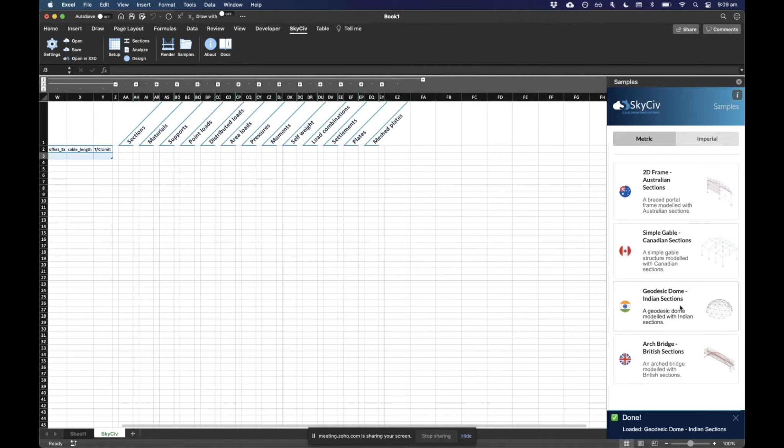There's all sorts of silly ones here as well as a few real ones. You could just open up one of these, and it'll bring the data in for you to experiment with, and you can work forward from there if you like.

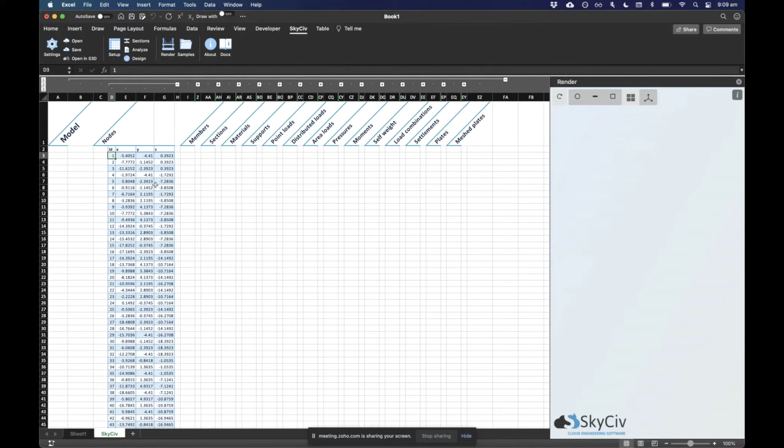Other than samples, we've got the renderer. This is really powerful to have inside Excel, because as you're building this model out, you can actually see what you're building as you build it. It'll live update — so that's the model we just clicked in the samples, reading straight off the sheet. If I deleted a few members there, you'll see it update.

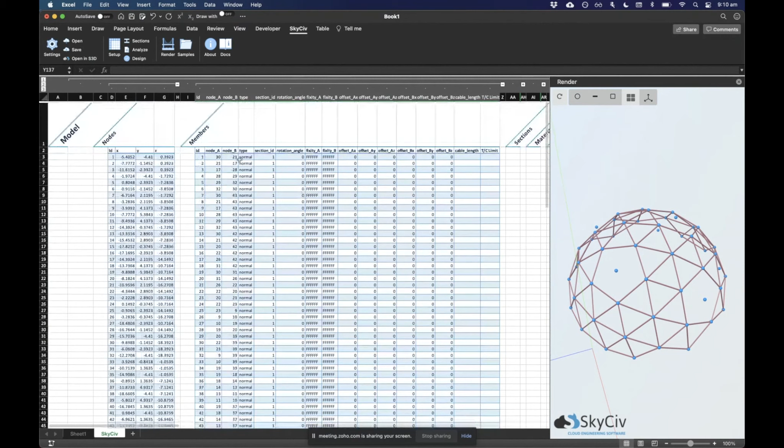There you go — you can see a few of the members have dropped out. It looks like we've just lost the lights in here.

Other than that, you can just build up your own model and you'll see it going. In fact, I might just show you what that looks like if we went from a clean sheet.

So we've got a node — we might just need to refresh that. Put in node 1, node 2. We'll put that at the origin, and then put this one at x of 1, 0, 0 — and you can see the two nodes have appeared here now. Then you can put a member in from node 1 to node 2, and you'll just need to give it a section ID as well. Even though we haven't defined any sections, the renderer needs that to understand there's something going on.

By default, the renderer will just show a square section. At the moment, we're actually trying to develop a way that we can provide detailed data of the section, so you can actually see the shape from within here, like you can on S3D. There's a few other things in here.

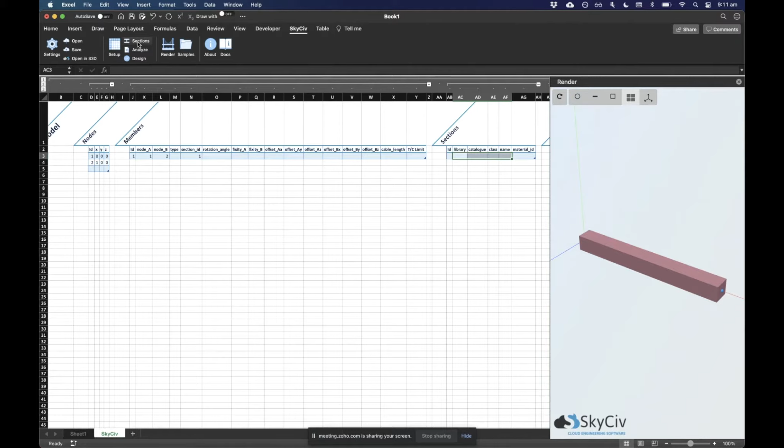You've got a section library, so when you need to put in sections, you've got to get these names pretty correct. You can do that by going through here, selecting whichever section and then inserting it, which we'll do later on.

You've got your analysis and design tabs in here, and then open and save. Open and save will let you grab models from the platform itself and import them into Excel. You can edit them, and then save them back to the platform. It's pretty handy if you've got a model already and want to run some calcs on it that you could do typically in Excel, especially if you're really good with Excel, you might find it easier to manipulate things in that sense.

The other main tab would be settings, where you can authenticate with your API details and also set up the model settings. You can change the vertical axis from Y to Z, and set the units for each of the different parts of the model. If you're into coding and using the API, you can also grab the model as a JSON object, which will copy it to your clipboard straight off the sheet you've built out. If you don't know what that means, don't fret, you don't really need to for now.

So with that, we'll look at one that I've already built, just a very simple example that shows you how handy it can be to use Excel to create other things. What I've done here is used formulas to create a curved facade.

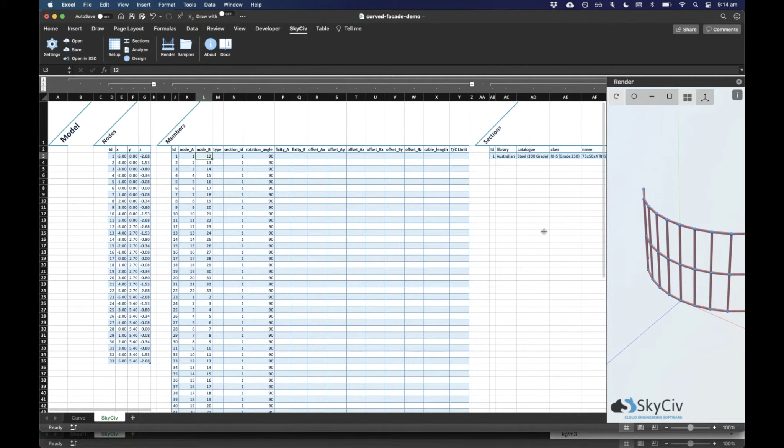You can see the reference here goes straight to that other one, and then we've got members, which have taken these IDs here and pasted them in. I'll open up the renderer, and you can see that facade there, the grillage. I've taken these IDs and aligned them to work my way along the bottom here, and then from there to there, and so on, and then vertical ones as well.

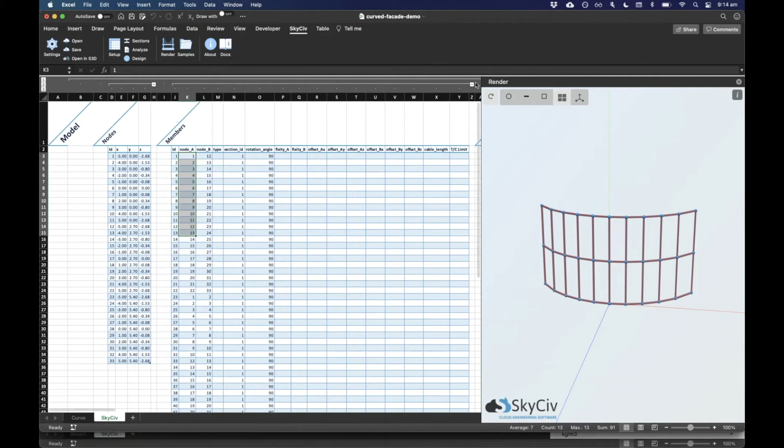There's a few other parameters that you can put in here to rotate members, offset them. We'll just collapse that one and flick through these other ones. So for the sections, I've gone with an Australian RHS.

Which is the rectangular hollow section. You can go into the library here and you'll see that it provides you with all those different details. You need to get these values exactly as they should be according to the library, so that's why we've added this in here.

So you could just go into, say I wanted to change it to square hollow section, we could go down to here and put in 65 by 3, and you'll see that here now. Then you can choose whatever section. As you add more sections, you'll see that they become available in here, and you can insert them. So if we did that, you'll see that inserts the SHS here.

Another important note here is that the handles on tables, that bottom right handle, defines what's in the table, and we use these to work out what data to pull out. So just make sure that you've always got the handles in the right place.

At this point, there would be 2 sections in the model. If I move that to here, there's now only 1 section, so I can just get rid of that anyway. Just be wary of that to make sure they're always in the right position to collect all the data.

Materials, you can define them yourself. There's a class key here which helps the design module. If you're going to do design, putting in steel will say this member is a steel member, so we need to run a steel design on it or something like that.

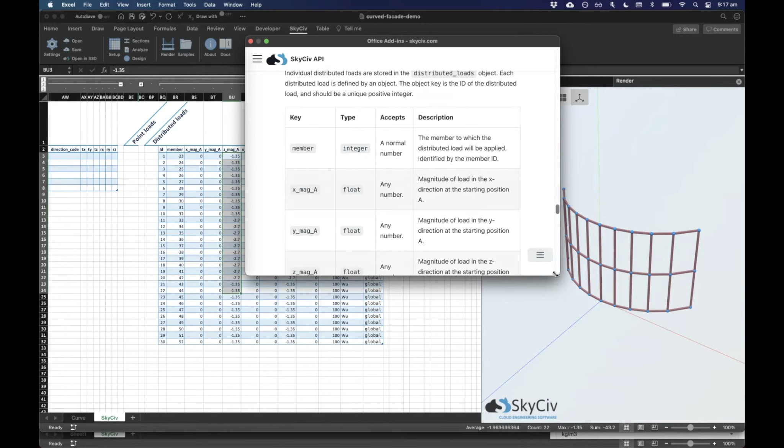In here, you can see all the parameters that line up with the columns. This is actually for the API, but that's what we're using with this Excel plugin, so the same information in here goes for the sheet. You can see that axis can be either global or local, and case does matter here, so that's why I've put in global.

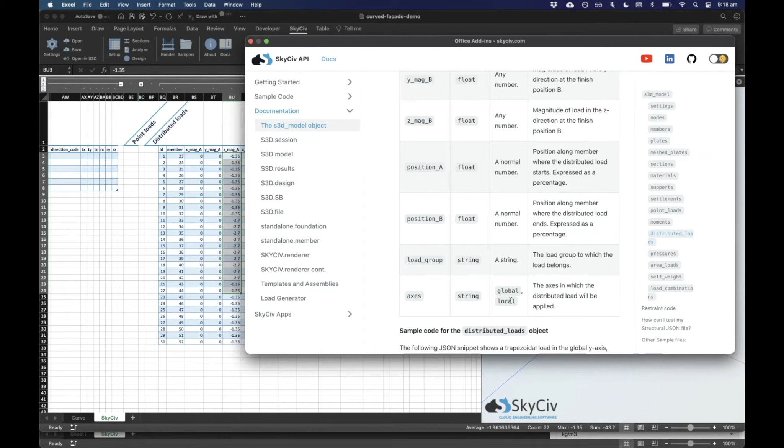Other than that, these ones are all pretty straightforward. We've created a load combination with WU, which is the load group we've assigned here, and the self weight, which is from here. So once you've done that, you'd want to authenticate.

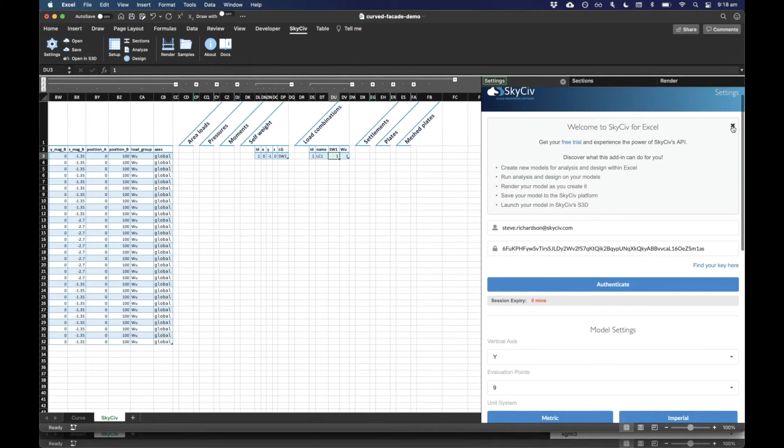If you go to here, you can find your key if you're not sure what your API details are, and that'll take you straight to the window in here. So you can just grab them out, copy them in, and then you can set the model settings, any details.

And once you've run—didn't put any details in there, so we're on the wrong sheet, that's why. Here you go. So if we run authenticate on that, that'll take a moment.

That's just constructing an API call to start a session, and each session usually lasts for about 30 minutes. We've put something here which will tell you that the session's expiring, but we've also recently set up the API so that as long as your details are here, it'll re-authenticate for you.

If you send a call after that time expires, it might just take a bit longer, but it'll re-authenticate and give you back a new session ID, which will be stored in there to speed up subsequent calls in that session.

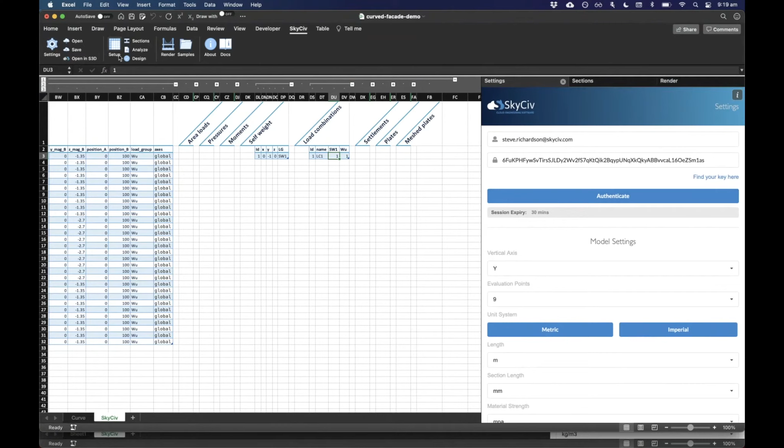So once we've authenticated, you've now got access to a few other things like opening models, analyzing, design. If you go to here, this will show you any of your file manager from platform, and then you could load up any model from here.

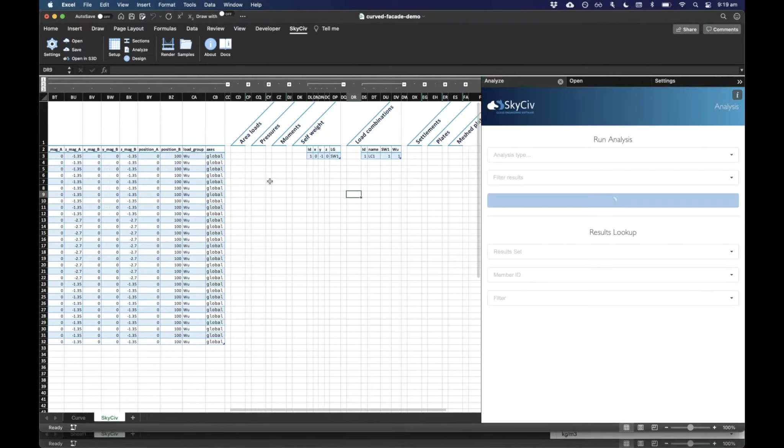So we might just run some analysis. Or to start with, a good way to confirm that your model's working, if you're not too sure, you can run this open in S3D button here.

This doesn't actually open a task pane, so you'll just see a little note down here saying that it's working. It just takes a moment. So you'll see it opens up a window and it loads it up in S3D.

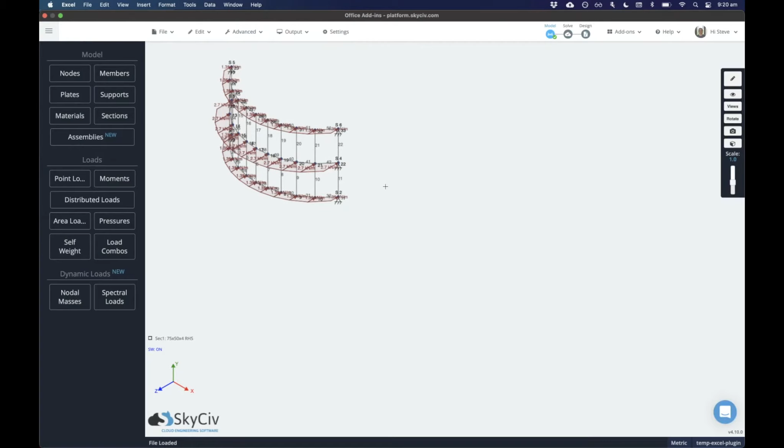You can see that's looking pretty good. The loads look about right, the supports are right. We could run a solve on it, and if everything's good, it'll run just fine.

Then you can sort of, as you would normally, go into here and look at anything else, any of the other information. So we'll get rid of that.

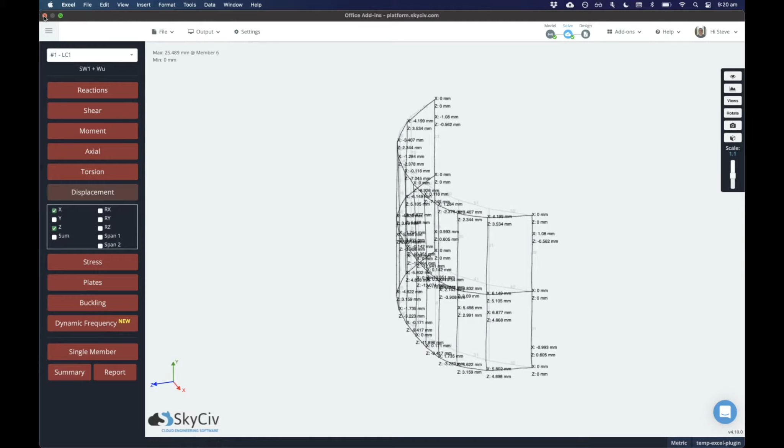Same thing as we just did there, you could run it in here. We've added some filter fields here. The data that comes back can be really heavy if the model gets big and you've got a lot of load cases, load groups, load combinations.

So what you want to do is, if you don't need all that data, set a few of these filters on it, and it could save you quite a lot of data and time as well, because it takes time for all that data to come back if you're on a slow internet like us here in Australia. So you can hit solve there.

Again, this is in the background. This is constructing an API call, if anyone's familiar with that - refetching the session, grabbing the model, putting it into a model solve function, and then sending it off. Data comes back, and you'll see it opens up or creates a bunch of new sheets down here. So we've got that load combination, the wind ultimate load group that we put on, and the self weight.

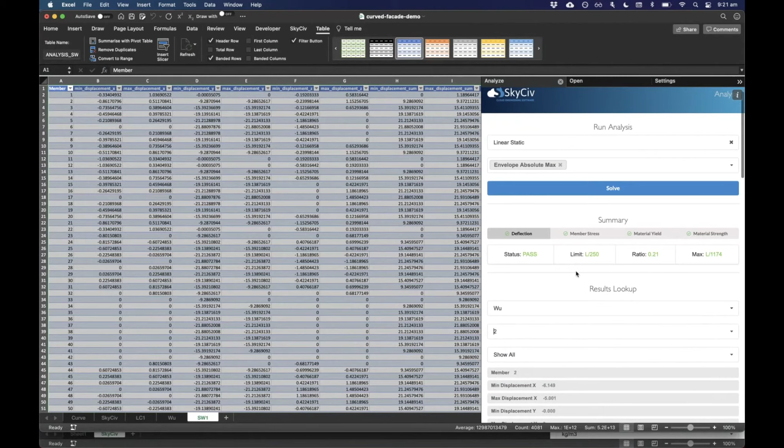So that's all the data's in there, it's quite a lot. We've also put in a little results lookup here, where you can pick one of the sheets and go through whatever member, and then filter by particular elements. So if we just click axial here, you'll see it'll only show the axial data.

And then similarly, we can go over and do a design. You can pick from your codes here. So if I go down here, I'm using an Australian steel design. I can run a design there.

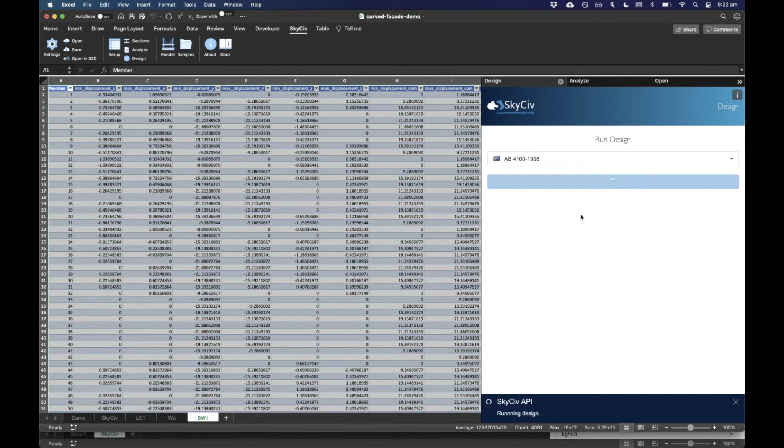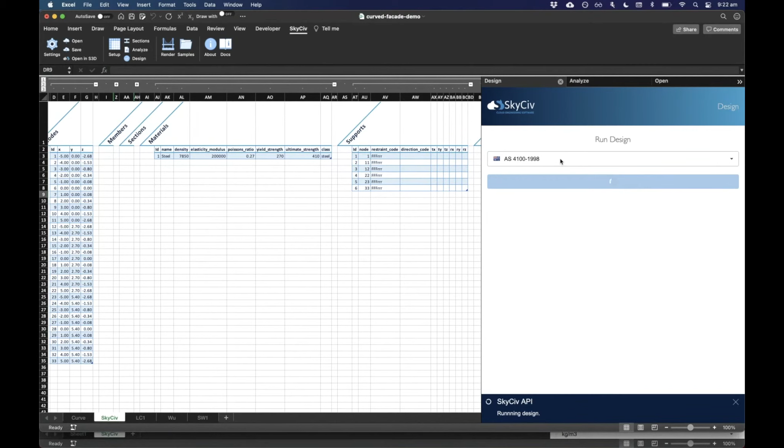It's important too that if your model is built with library sections from the US catalog, you'll need to run a US design. If you try to use metric sections from a metric country with Imperial, it won't work - it'll give you some feedback saying you need to make sure everything's in Imperial or metric.

So you can see all the design results have come back here again, same as analysis. So you've got some information on every member in the model.

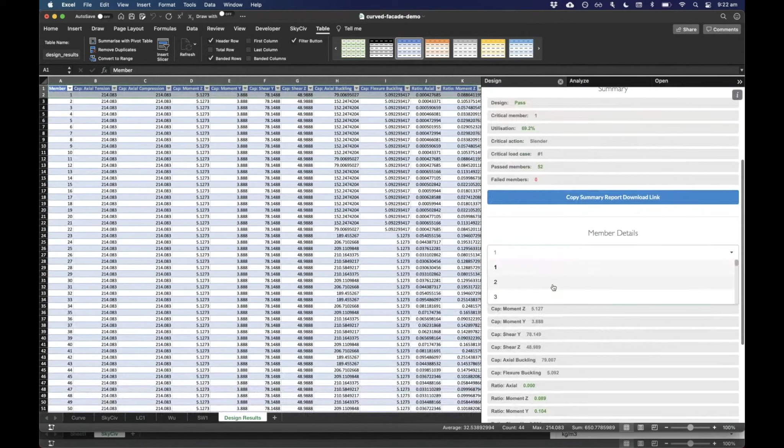Same deal, we can go through and pick out one of those and just look at the information for that particular member - member 4. You can copy the links for downloading the report, and that'll copy it to your clipboard, and then we can just go back over to the browser, paste that link in.

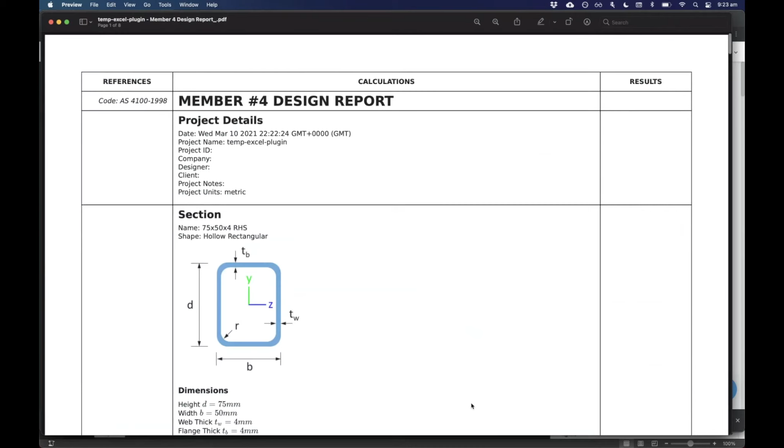And you'll see that it creates a report for you. So these reports don't actually exist until you paste that link in, and then it'll generate it and download it. Once that's downloaded, you can open it up and you'll see you have a full report on the member, or the entire summary of the model, depending on which link you followed through with.

So that's probably most of it. I think we'll be ready to head back over to Trevor in a moment. We've got the About tab there, that'll give you a bit more information on setting up the model, or just the plugin in general, if you're still not too familiar with it or not quite grasping it.

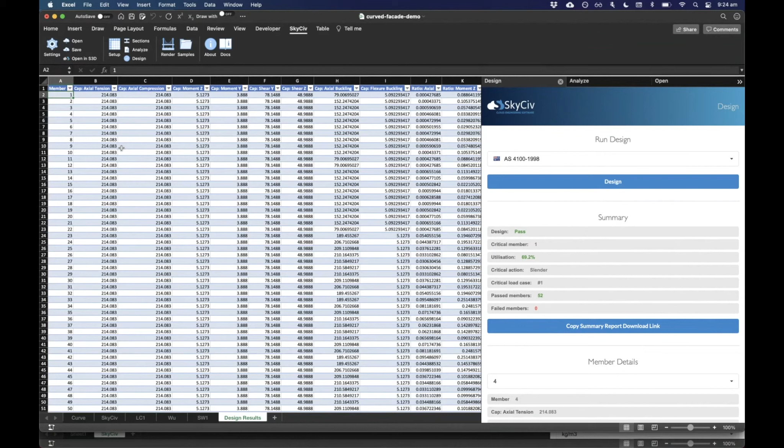All right, let's see. Thanks, Steve. That was really informative, really great. Hope you guys liked that demo. We'll just touch on a couple things here to finish up, and then we'll look at some of the questions.

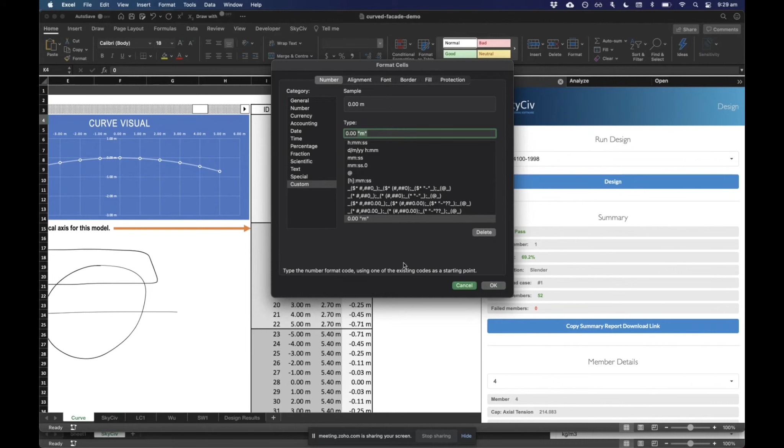Do you want to show your screen, just to give a quick context to that? Okay, so if we went back to the curve sheet here, I'm guessing this is what Jake was talking about. So if I put in 5, you can see it's always got M after it. To do that, you go to custom here, and you can see how I've put in 0 down in custom - you can go 0.00 and then in quotes M after. So that's how it knows to put the M after. Yeah, so it's more just like a custom label on the type of cell. It's not so much a unit per se, it's just a custom label to help you understand what you're looking at.

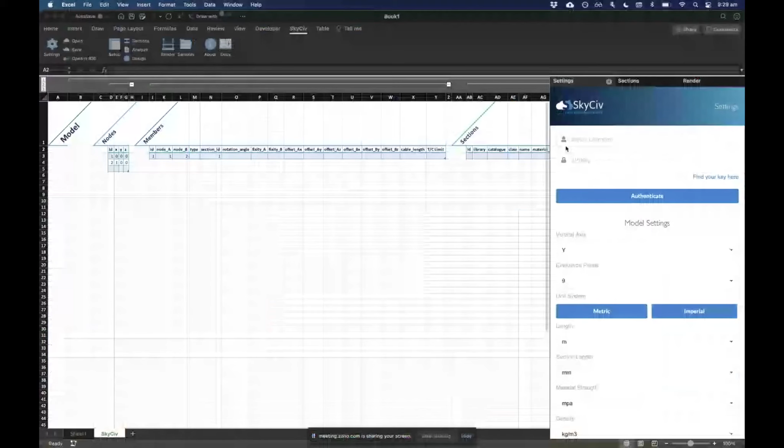So that principle can be applied to really anything. So another question: what design codes does it support? I can help answer this one. If you go to the website, SkyCiv.com, there's a lot of design codes - there you go, perfect.

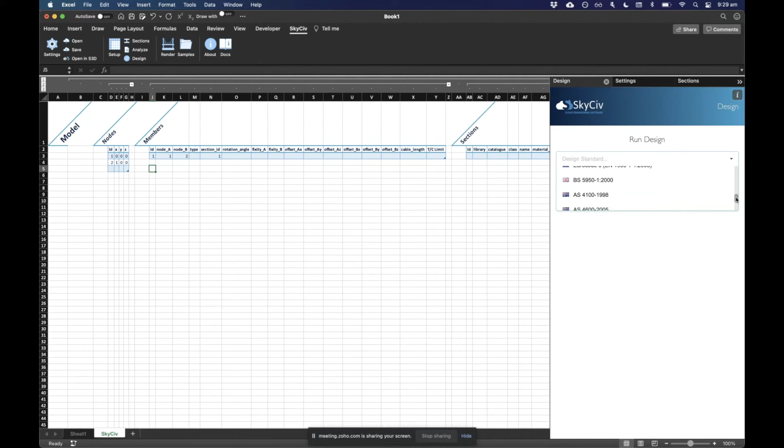So we have steel, concrete, and wood design, and it varies depending on the country. The most design codes we have are for the United States, and then after that it's Canada, Australia, Eurocode, some of the British standards. Those are the main ones. But we also have some upcoming design codes from Indian standards as well. So it's constantly changing, we're constantly adding them. Those are just some of the design codes we offer that he's scrolling through now, but a full list you can see from our website. It really depends on the country and the governing code base you're looking for.

Next question: I understand that this plugin creates an API call to the server - is the number of API calls limited, as is the case with the SkyCiv API? I'll let you answer that one since I mentioned it before, but you are using an API call when you're using the Excel plugin. So it is like the SkyCiv API - it's just that there are certain actions that do use a credit and some actions that don't use a credit.

Yeah, so it's pretty much just anything that's solves or design. You can see that on the API docs page here, which is that little link I clicked inside the sheet before. So anything to do with design and analysis, really. That first half, when I was just working in here, I hadn't even authenticated, and I was creating a model and rendering it. You can then save it to your platform without using any API credits. So if you're not really looking to use the API, you could still create models and save them to the platform with this plugin.

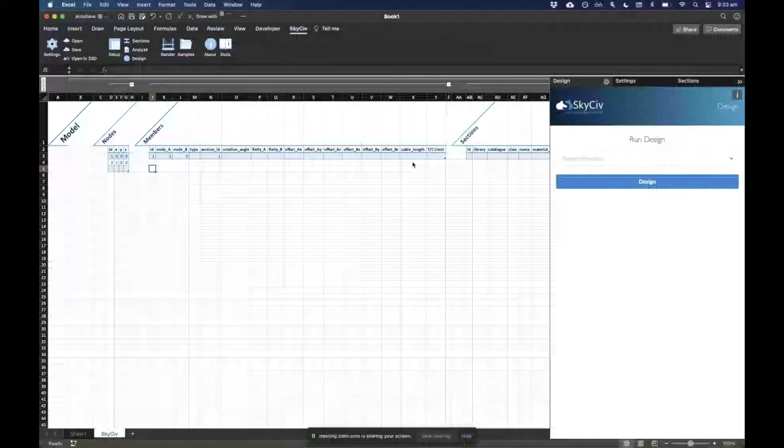The last question on the docket is, can you add custom beam sections in the Excel plugin? Yeah, so you can do that. It might take a bit of remembering from me, but I do recall adding that in. It was by setting the library key to something else. Let me check the docs to see if I put that in here. It's something like you can put in custom_section, and then in catalogue, you just put the name of that section. I definitely need to document that a bit more clearly, because it's probably something you wouldn't quite pick up on.

Would those be in the My Sections area of the section builder, those kinds of custom sections? Yeah, so if you went into section builder and saved your own custom sections, that's what the name would be. You'd go load custom here, and then put in the name of whatever it is, My Section, something like that, and that would load up your section.

Okay, for people unfamiliar with the platform, Section Builder is basically the integrated tool with Structural 3D that allows you to create custom sections, importing a DXF, importing some special proprietary section you have, or creating one with a bunch of different database shapes, really any type of section you can think of. Not only does Section Builder do an FEA analysis to get the section results, you can use those sections within Structural 3D for analysis. So those sections are what the question is about.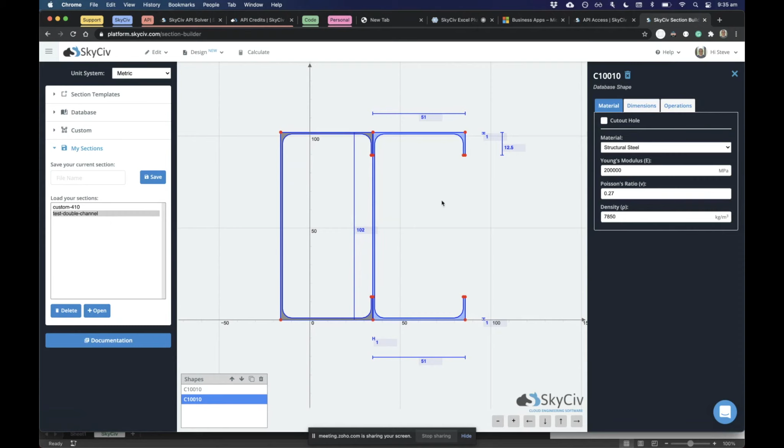You can save those and use them for later, and those would also be specifiable in the Excel plugin. Yeah, so it'd be something like this, and you can just use this name here, and you just need to put the key load custom. I'll make that a bit more clear, probably add that to here if I haven't already, on this about page.

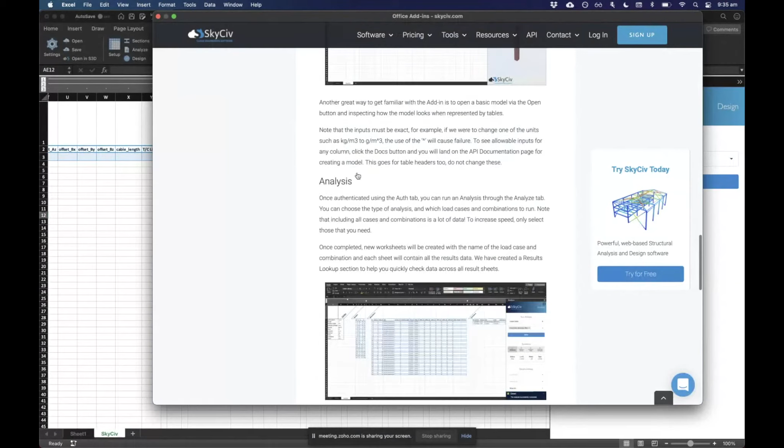Are you looking to add connection design functions to Excel as well? That might be down the track a bit. At this stage it's still very fresh, we've only just released it about a month ago or so.

We're a pretty user-driven company, so where the users want to go is kind of where we go. If there's a concentrated liking towards something, or effort from users asking us for something, and we notice a trend, we're going to divert a lot of our developmental resources to creating that tool, and the best version of that tool that users can be effective with. So that's a good question.

Just keep your eye out for things. One more tidbit: when you're signed on with us with a professional account, because connection design would be part of that, there's no upgrade fees, maintenance fees, or downloads required. Anytime there's a new feature that gets rolled out or released, it just appears on your dashboard, ready to use day one.

Thinking about that, I think that would be very popular amongst users, and it's important to have in there because it plays a big part in our design. We can look at adding that in, and it would have to be custom to each code. Once you pick your code, we could have it pop up with a few more options for setting your lengths, or it could likely be better to have it in a table.

It's always good to start with what we have now. It's a brand new tool for us, so we're looking for as many ideas and as much feedback as we can. Making things more granular and expanding the complexity is our goal. So definitely thanks for that question.